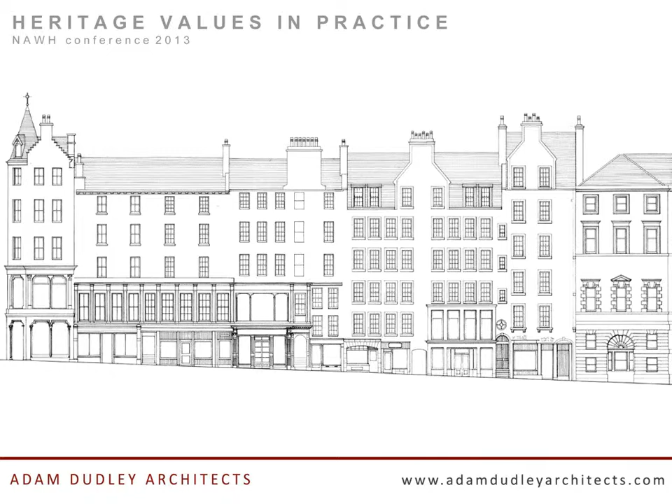So, first project, I hope this works, there we go. Lawnmarket Upper Bow. So essentially what we're dealing with is the balance between the overarching heritage value, as we perceive it, against the primary project drivers. And if we take the Edinburgh World Heritage Site, there's some 4,500 listed buildings, another 1,500 or so historic buildings. And it could be argued that each of these possess some heritage value of some sort.

And as practitioners, we have to distill from our appraisal of these buildings what these values might be, taking into account the history, the context, the architectural, cultural significance and so forth. By doing so, we hope to gain an understanding of what it is we're trying to protect. Alongside this, we have the client brief, we have a budget, we have technical and statutory constraints to contend with. So it is a balance.

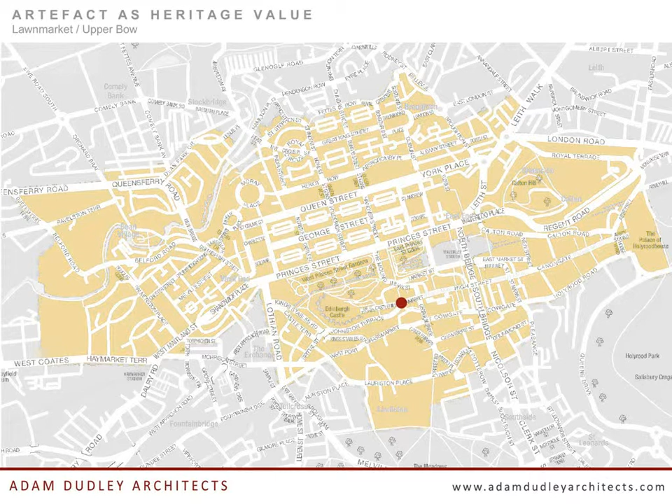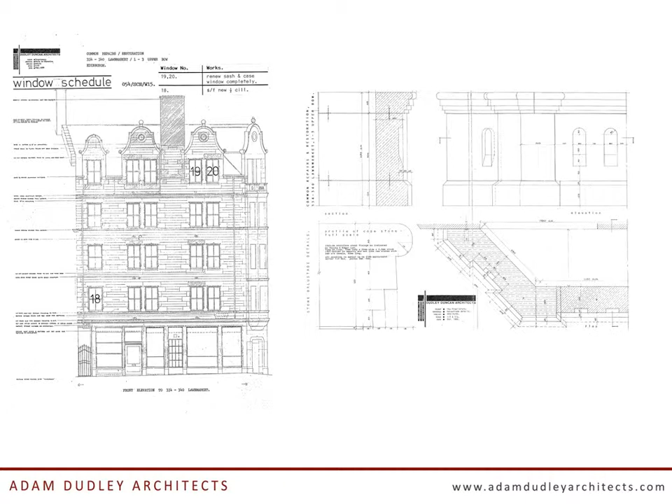And thankfully, the Old Town Renewal Trust recognised the building for what it was, and along with Edinburgh Council, agreed to fund a programme of repairs. Great opportunity to exercise proper conservation repair practice, all lovingly hand drawn. That was pencil and tracing paper, if I recall, in the good old days. And as you can see, remember the previous photograph, that's the building restored.

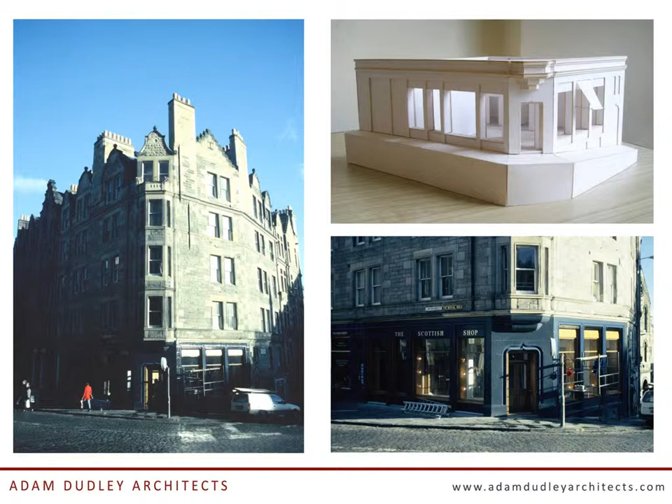And as is often the case, the first phase was the above the shop level. The Scottish shop, they're only interested in marketing their merchandise, but again with funding from the Old Town Renewal Trust, we managed to persuade the shop owner to change the colours. We put the oak shutters back, and we completed the building. So that was an example of heritage as artefact. Moving on.

Okay, this is an example. Just go back before. This is Dean Village. Okay, Damside Dean Village. Organic growth, sensitive organic growth. And in this, we took the view that what we were protecting was the village character. The building had undergone various changes, starting off as a two-storey dwelling with possibly a blacksmith's workshop alongside.

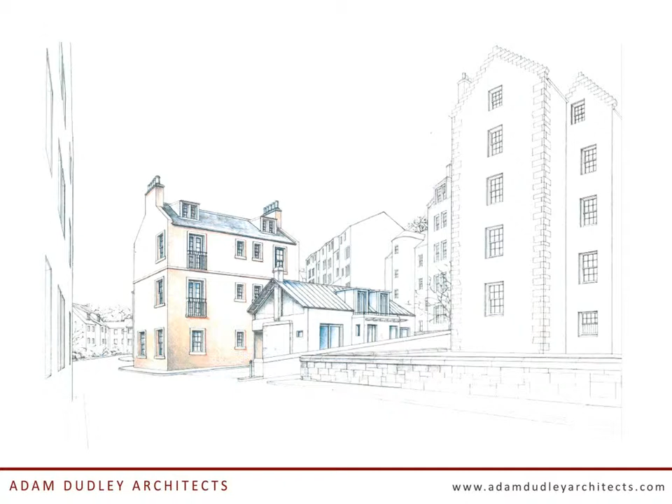It was constrained by statutory consents, and the developer, a design-led Edinburgh developer called the Borough Company, wanted to obviously maximise the accommodation. So we set about just picking up on local characteristics, features, architectural features, the dormer windows. The workshop wasn't worthy of saving, so we demolished that and used a more modern palette of materials. And this is what we ended up with.

What I would add in all these cases, God is in the details and less is more. That's inevitably what we found: the developer would cut corners, and instead of the concealed gutters we had planned, aluminium gutters; instead of the glass balustrading, a rather crude iron. But at the end of the day, this was the composition, and the building mass remains as it is, and we have an example here of continued and controlled organic growth.

I'm doing time-wise, all right? Thanks. Okay, I'm going to speed up.

In this case, the next slide will show how we looked at it, but we ultimately decided that actually it was the streetscape that was important. It was the richness of the building massing and the roof configuration, the scale. I mean, this one was referred to as the doll's house scale. It does look like almost 2/3 scale of the adjacent building.

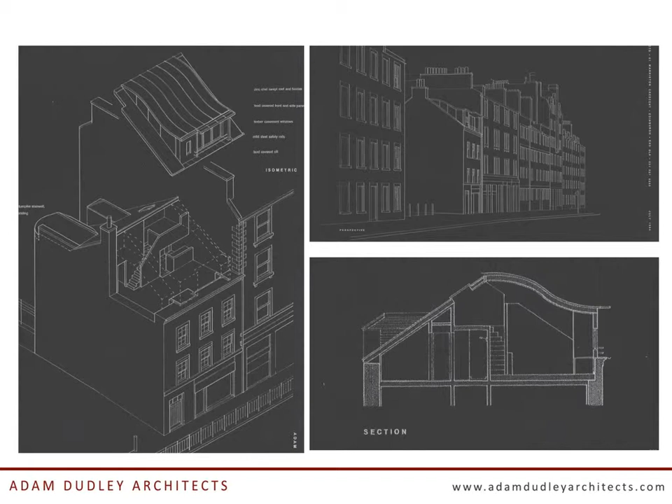But sometimes you get it wrong and you have to explore these things, and on this occasion, we thought, well, we'll treat it as a one-off building, it's not really part of a collection. We looked at doing this fancy curved roof, which was very much the vogue at the time. Yes, we can all fall victim of that. But actually, on reflection, we also heard that the tenement next door would be reinstated with the pend access. So it felt only proper that we should restore the original buildings.

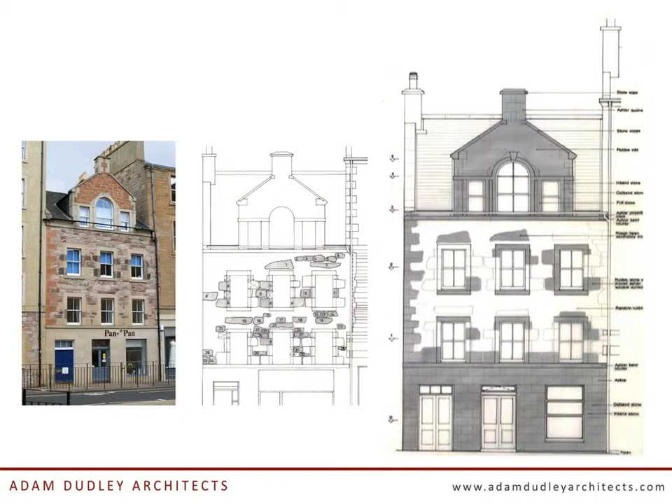And fortunately, we were able to survey absolutely every part of it. All these are numbered stones. They came out and back in exactly the right position. The whole facade was taken down and rebuilt. But it wasn't Disneyfication, as you called it. This was a genuine and faithful restoration of the original building. However, we also needed to modernise, so it gave us the opportunity to do something different internally, and the building's been a great success.

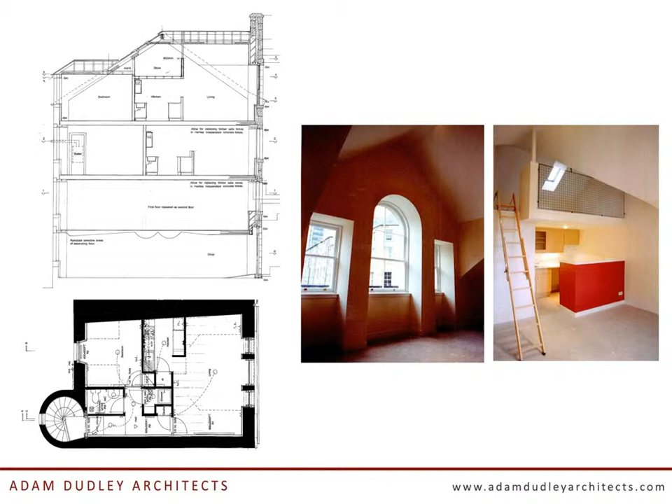Next one, the Royal College of Surgeons. Okay, this one's called Past Reflections. That's the heritage value, and I suppose what we're saying by that is what we're trying to protect there is the heritage value. Now, the reality is the building was no longer fit for purpose. It was past its use, so the college needed a new building to serve a new function.

And we took some basic design decisions: the facade of the old medical school, we would make sure that we weren't going to cover that up in any way. We wanted not only to retain the building presence, but improve, enhance it and its connection with the street. So we created this promenade, the courtyard.

We elected to use robust materials. So it's granite, it's stone, it's phosphor bronze, it's stainless steel roof, and the massing was to sit comfortably next to Surgeons Hall. And obviously we've got the 1960s blocking the path.

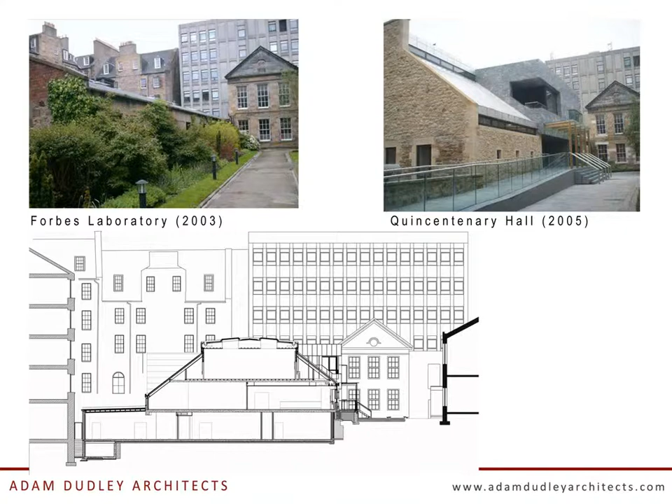We also attempted to pick up on some of the local features. A chimney gabled wall. Obviously this is, using a bit of artistic license, an interpretation of a wall head dormer. And here it is. So, there's a chimney gable, there's our version of it, obviously no chimneys. We've got the wallhead cabinets here, the dormers here, this is our interpretation of it. Issues of privacy, roof lighting, that sort of thing.

So the first image showed the Oceanographic Labs, very much looking as a ghost. Well, the ghost has reappeared in another form, but the building's still there.

And there we have 10 minutes left, thank you.

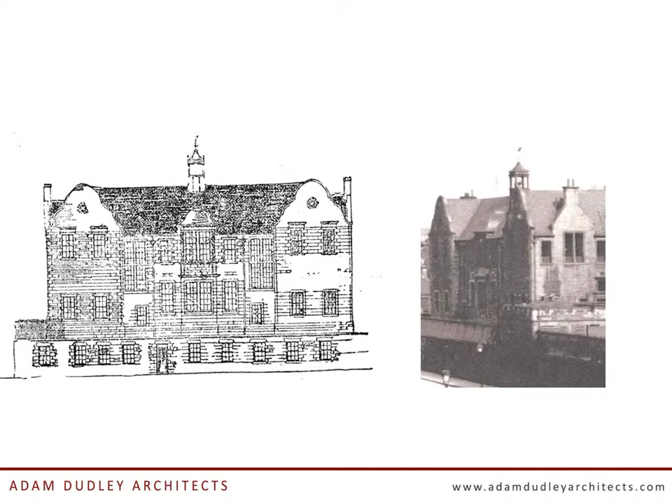Okay, so there's some details of the building, unashamedly modern. This is the old North Canongate primary school, which is here and it's here. Now, the reality of this building, it did have some architectural significance. The architect himself had some significance. We had access to original drawings, but that's as it is now. Here's some of the architectural features. Certainly not worthy, in our opinion, of demolishing.

And we were brought in to do a conservation study at that time, and I'll bring some hot off the press news up shortly. It was scheduled for demolition as part of the Caltongate scheme, and what was taking place was a new build 5-star hotel. But more importantly about this building, it was the cultural and the social value. It opened at the turn of the century. It looked after the educational and physical sustenance of the poor of the North Canongate.

It had gone on to become a vegetable market, a building skills college, and latterly the Canongate venture, which was offices and workshops. So it's very much ingrained in the collective memory. And local community groups, the Old Town Development Trust, are behind and have been behind trying to save the building. And this is one of their newsletters.

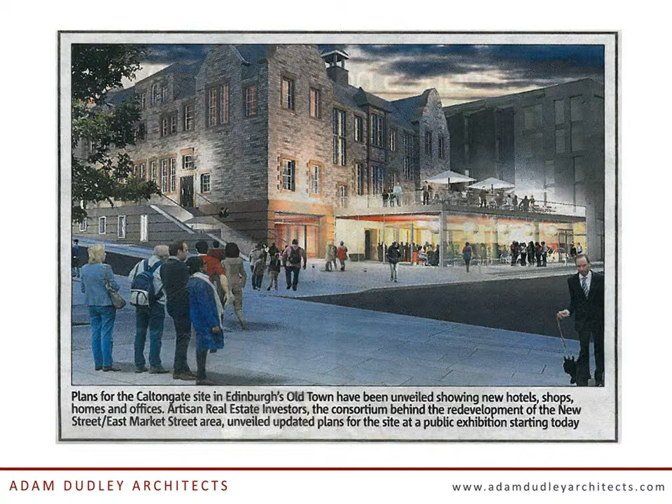And lo and behold, it's funny, we had a prospective developer phone us, and the evening news last night, was it? Anyway, the bottom line is new developers come along, and they are no longer looking to demolish the building, and it is a case of extending and altering and upgrading, and the building is saved. So this is macro and micro imperatives as heritage value.

Okay, there's a number of projects here. This is very much to do with the fact that we need to do something about the energy performance of these historic buildings. Most of the buildings within Old Town and New Town are constructed the same. It's mass masonry walls with linings of one form or another. It is slated pitch roofs, it's sash and case windows, it's dormers, roof lights, that sort of thing. And they're all particularly energy inefficient. So we have to do something about it.

So the overarching heritage principle here for us is the building fabric. It is the features and it's the utility. Against that, what we're trying to achieve with the programme is improving the fabric performance. It's occupant comfort, it is disruption, it's capital value, it's operational values or costs.

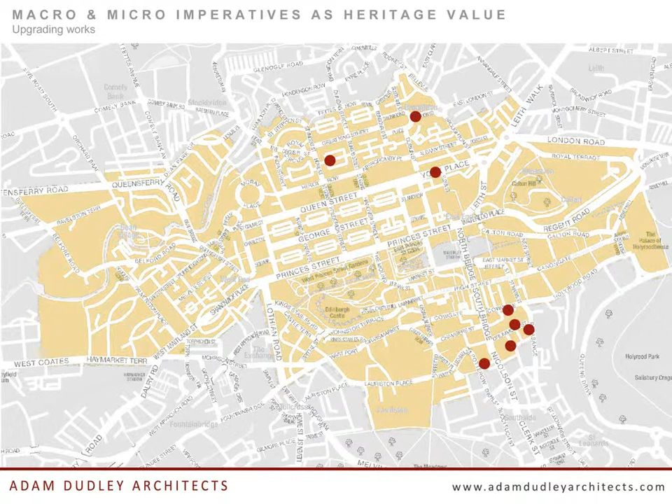So what we've been working on recently is a range of treatments for lightness of touch, to avoid any decanting, to minimise the disruption, to have no loss of original fabric. We've done treatments for different elements. So this is one where we're trying to combine complete thermal continuity, where we're treating the heat loss through the windows with bespoke secondary glazing.

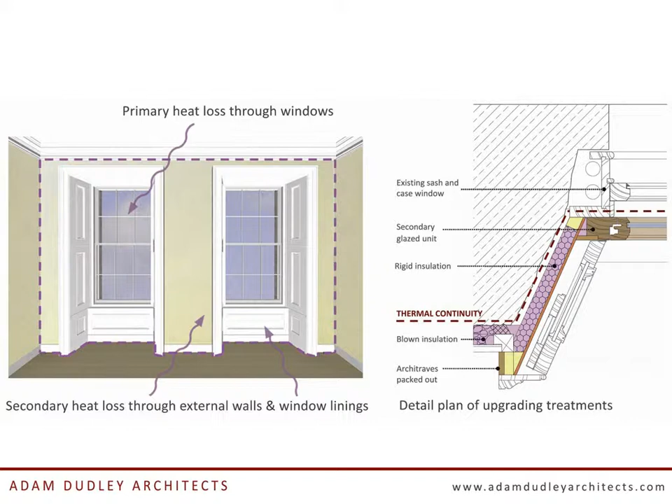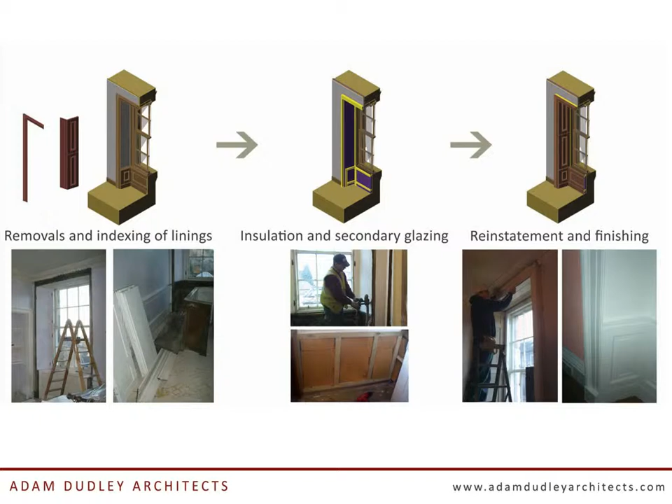The way in which we do it allows us to insulate behind the shutter pockets, in this instance it's shutters, and we've got secondary glazing. So we lose none of the existing fabric, everything still operates as it should. This is just showing some of the treatment: blown insulation, rigid insulation, hemp or wood fibre, and this is just showing briefly how everything operates. You'd be hard pressed to notice the difference from the inside or the outside.

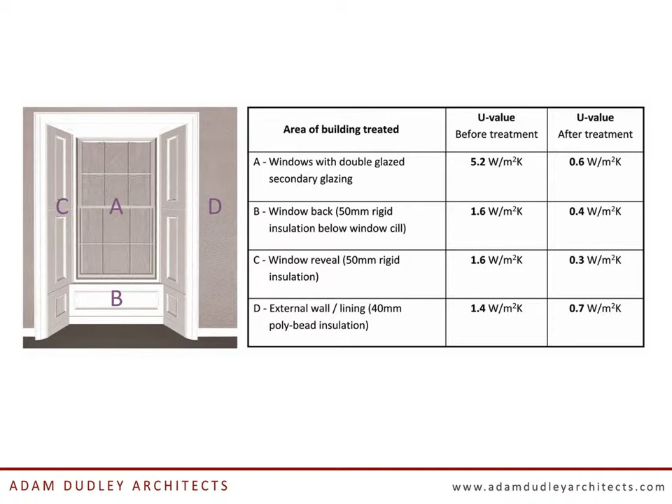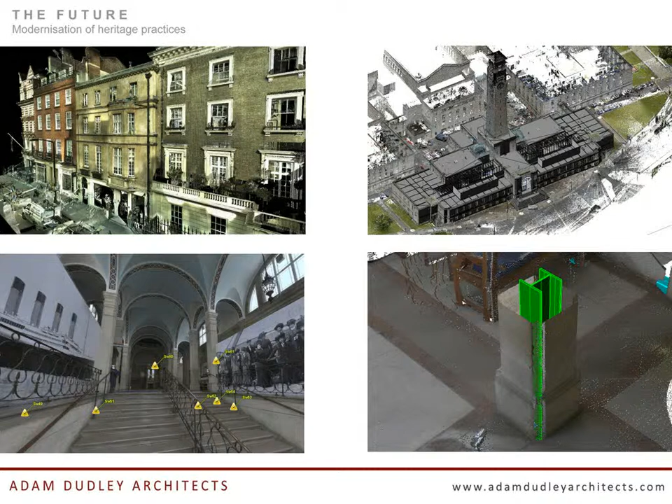So the future. Climate Change Act 2009 Scotland. A big challenge. We've got to reduce carbon emissions by 40% by 2020, by 80% by 2050. At the current time, buildings take about 40% of the UK energy. In Scotland, 50% of the waste that goes to landfill is from construction and demolition. We need to take a good look at ourselves. When it comes to demolishing buildings, we need to consider the embodied energy. And, case in fact, there's the developers for the Canongate venture having done that.

So we need to invest, we need to find a way to make these buildings in Edinburgh World Heritage energy efficient up to prominent standards and truly sustainable. We need to invest in traditional building skills. We also need to embrace modern technologies. I know as conservation architects you assume that we wear tweed suits and don't work on computers and don't have access to modern technology. You couldn't be further from the truth. We have to collaborate with other specialists, and we need to bring how we treat old buildings in line with how we view modern buildings. We do zero carbon modern buildings; we should be looking to do what we can with existing buildings.

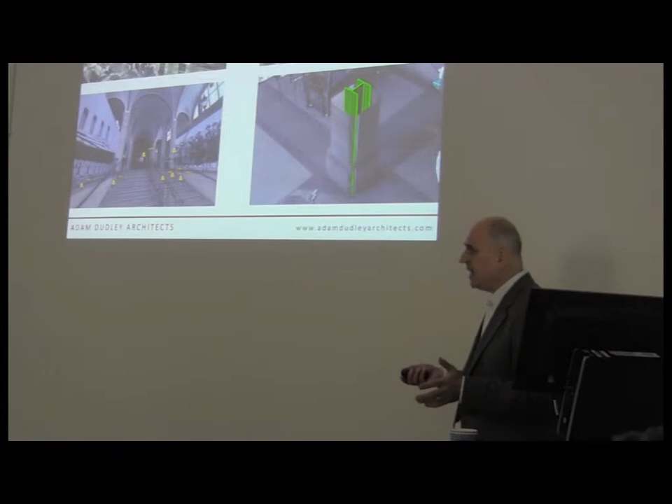So the last few slides are just to show what's out there. This is laser scanning, and what this is able to do is produce a 3D model from a laser scan, from a point cloud. And you create an incredibly accurate model that you can work with. There's a model created from a point cloud. And these are just positions where the scanners are.

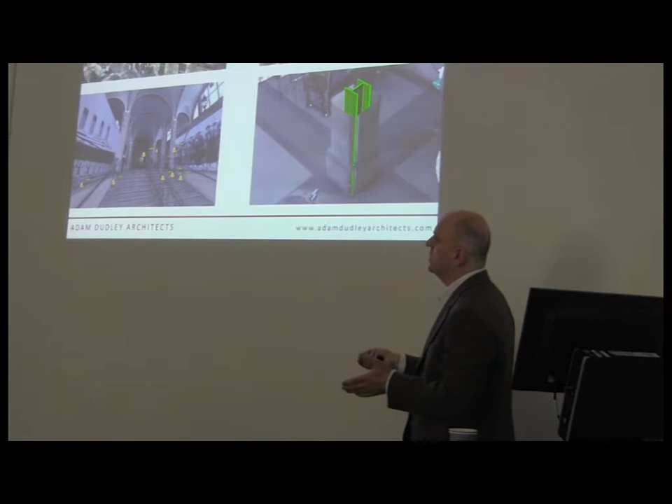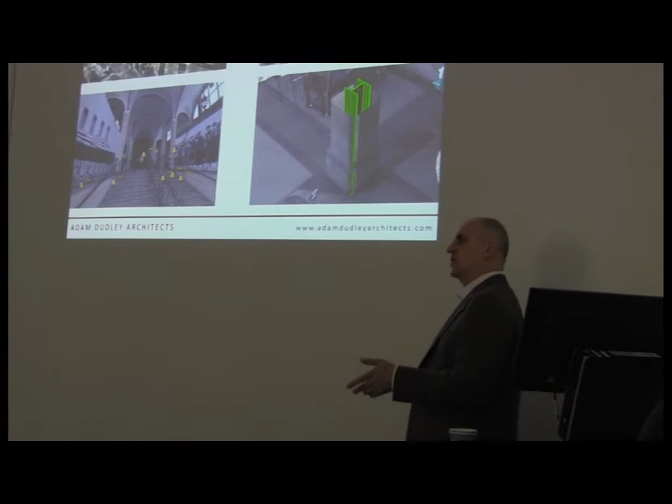Now, that could be used to establish whether a stone is delaminating or not without having to get scaffolding up, cherry pickers. Ultimately, the information that a laser scanner can get can be transferred digitally onto a computer, onto a lathe, to completely replicate, and we've now got 3D printers. So there are all these opportunities out there, and again, this is an example of modelling through point cloud and introducing other CAD software.

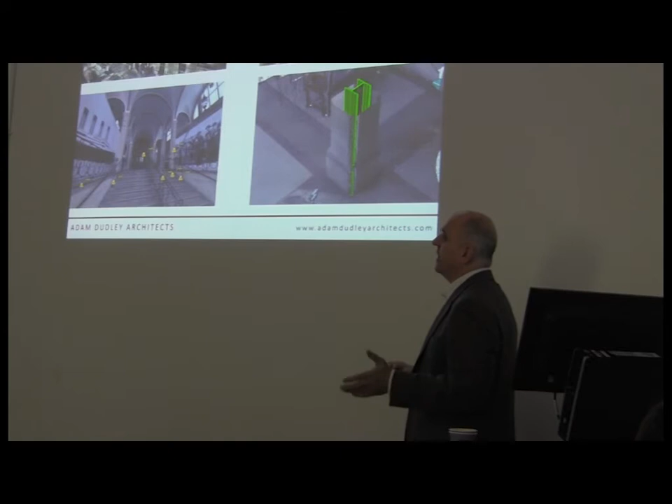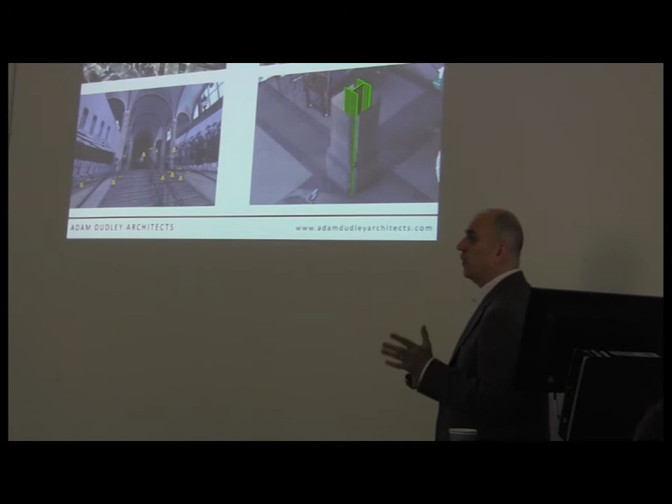So I would finish on this. The future is bright. We've got fantastic building stock in Edinburgh World Heritage. We do need to change the way in which we practice.

How's that? That's perfect. Good. Thanks, Dennis. Thank you.